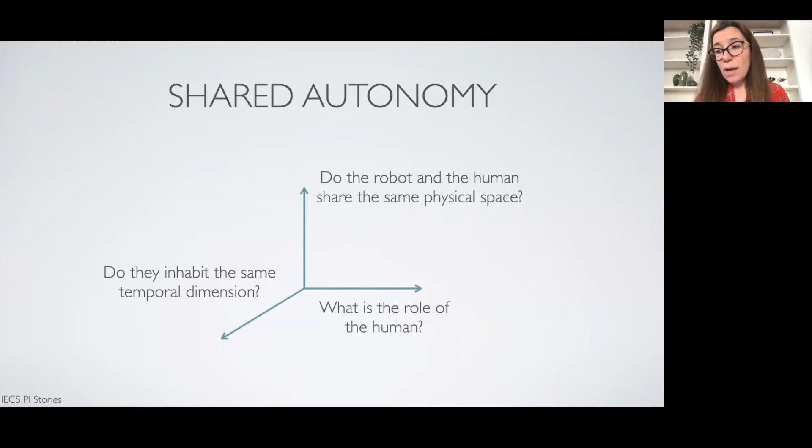The first is whether the robot and the human share the same physical space or not. The second is what is the role played by the human in this shared autonomy interaction. And the third one is whether the human and the robot can communicate smoothly with one another. And now I'm going to explore the interplay between these dimensions in the context of extreme environments, which are at the core of my research.

So extreme environments are all those environments that present very challenging and extreme conditions that make it difficult or impossible for humans to work in those environments. So examples are space mission operations or operations in nuclear facilities, subsea operations, and then applications in mines, underground, oil and gas, and so on and so forth. So in all these contexts, usually what we want to try to do is to send robots instead of humans as much as possible.

So in this case, if we consider this spatial dimension of interaction, we see that the human and the robot usually don't share the same physical space. And this is the whole point, right? We want the human to remain safe and to send the robot in the remote space in order to perform tasks. So they don't inhabit the same physical space.

Now, due to this, in many cases, there are some significant delays in communication between the robot and the human. Imagine, for example, space mission operations or operations underwater. In this case, there is such a delay in communications that it is impossible to teleoperate the robot or to control the robot closely.

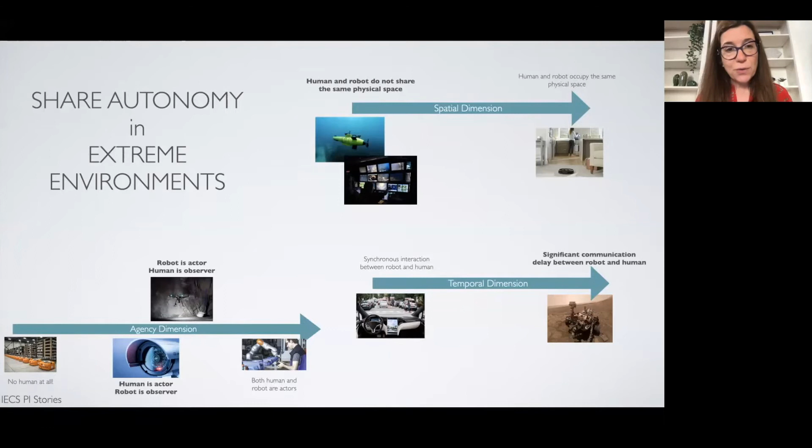And so we say that the robot is the actor and the human is the observer in this kind of applications. Now, clearly each extreme environment has its own specificities, but we can see that in fact they share several common challenges. And here I will highlight the most important ones from our point of view.

So the first one is that the robots need to exhibit a high level of autonomy. And this is because those robots usually function beyond line of sight. So they need to be independent and they need to be able to do tasks, and they cannot rely on direct help from the humans if something goes wrong, because the human is far away.

Then clearly robustness of operation is crucial here. And this is because these are critical environments where any mistakes can lead to fatal consequences. So we need our robots to be exhibiting an extremely robust behavior. And then also in these extreme environments, there are safety standards that are very strict in place. So those standards need also to be satisfied by the robots.

So safeness of operation is crucial, and also the ability to provide guarantees on performances for the robot. And then also imagine that these environments are characterized by a high level of uncertainty, and so the robots need to exhibit a flexible behavior, so dealing with all these uncertain factors, and also flexible because in these environments many tasks need to be performed. So we cannot really train the robot to do exactly one thing like with machine learning techniques. We need to have a robot that can perform a variety of tasks with sufficient robustness.

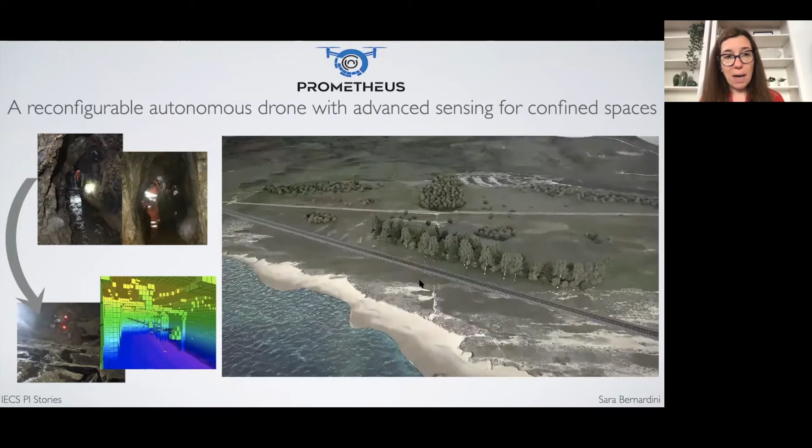So let's start with the first one, which is called Prometheus. So Prometheus is about exploring mines that are close to the Network Rail. And in fact, currently these mines are explored by human operators, as you can see here, but these are extremely dangerous tasks.

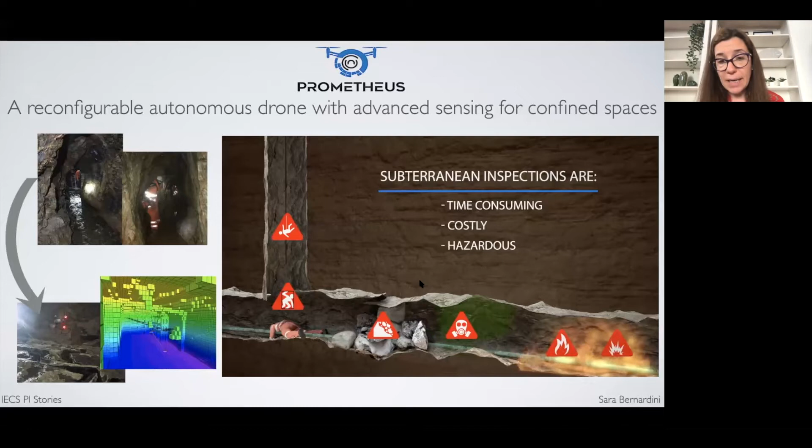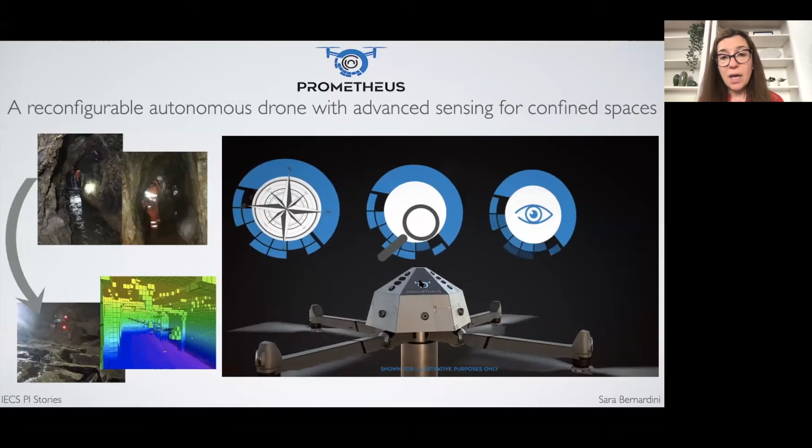And there might be fire, there might be gases in these mines. So these are extremely dangerous environments, and so it would be much better to avoid sending humans in these spaces. So our idea here in our consortium is to develop a drone that is reconfigurable. And this drone will be able to inspect these mines underground by using AI techniques and also advanced sensing techniques.

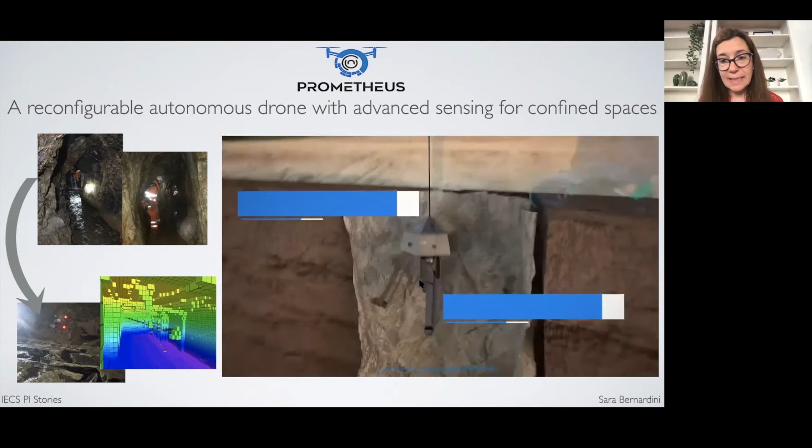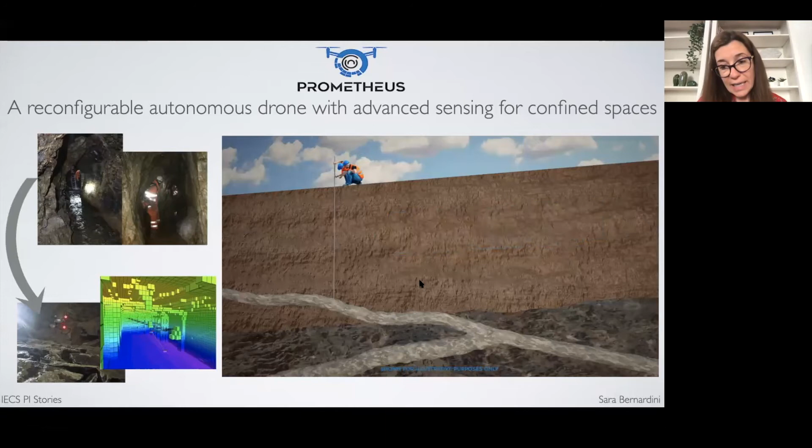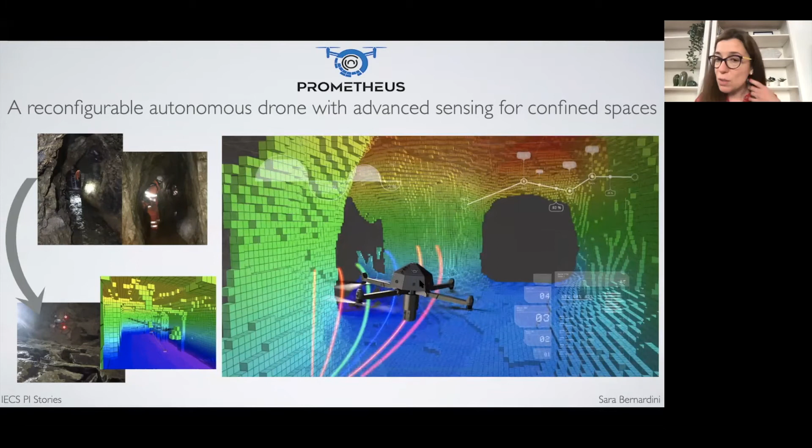As you can see, the drone is quite small and can enter into places, holes that are 150 millimeters. And then once it reaches down, the drone opens up to be able to fly inside, beyond line of sight. So as you can see now, the drone is open here like a flower, right? And is going to map the area. And this is what I am responsible for: this intelligent exploration of the mines to create a volumetric map and a map of the environment.

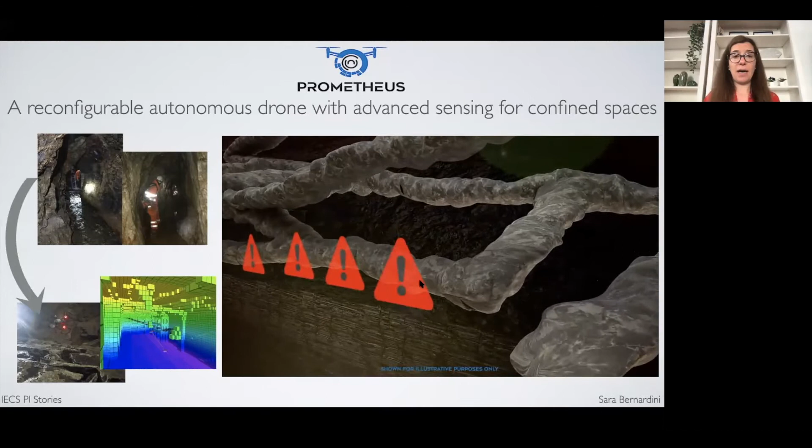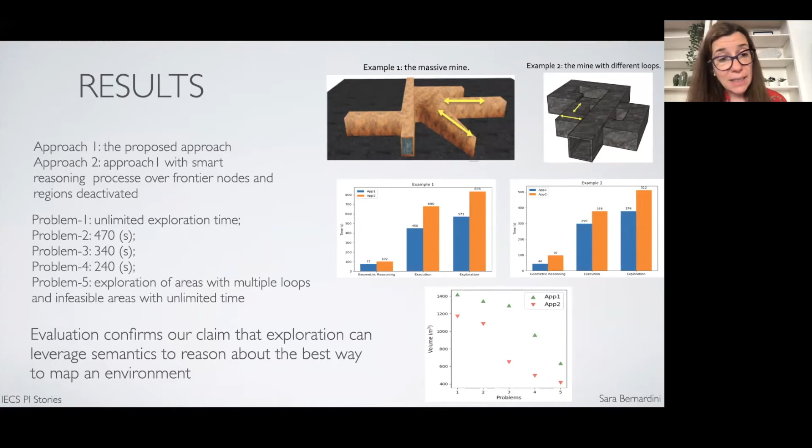Now, these are actually some results that show that our approach, represented here, is able, thanks to this exploitation of semantic information, to explore bigger regions in a shorter amount of time. And so our evaluation confirms our claim that exploration can leverage semantics to reason about the best way to map an environment. Now we are working on an improved version of our autonomy architecture for exploration.

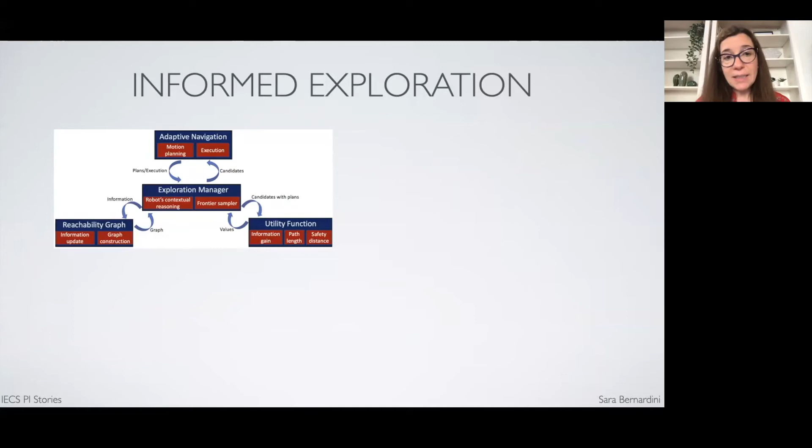And so what we have done, we have improved the rapidly exploring random trees in a way that we call risk averse, because in extreme environments, and in particular in these applications about mining, it is very important to be able to retrieve the robot at the end of the mission. So we want the robot to be able to go back home and come out from the mine. And so in this risk-averse version of RRT, we allow the robot to reason about known space in order to find paths, instead of also considering unknown space, because when it wants to go back home, the robot needs to be able to take a safe path.

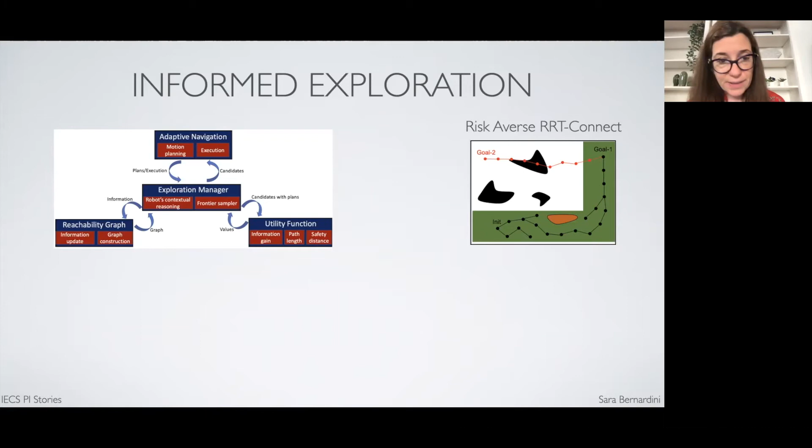So we have modified this technique to make it more risk averse. Then we are using now, instead of the semantic network, what we call the double weighted reachability graph. This is a graph that we have developed, and this graph represents the structure of the environment, also keeps in memory dead ends and places already visited, so that we can maximize the space explored in the time that we have. And so also we keep track of the best candidates that need to be explored next.

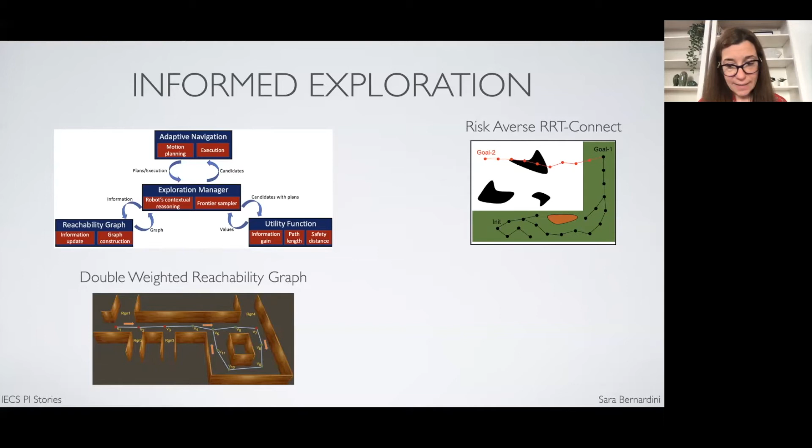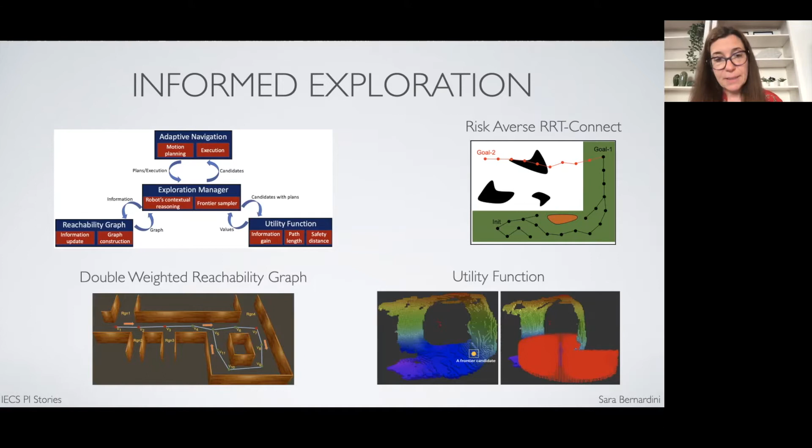Now, to actually choose the next point to explore, so to choose between the different candidates that we have in the open frontiers of nodes that we still need to visit, what we do is we use a utility function, which is based on information gain, but also on safety constraints, because again, in this application, safety is very important, and also on path length, because we also want to consider the resources that the robot has. Because as you know, flight time is limited. So this is our improved architecture.

And in fact, here you can see that we have used it to map real world mines, actually in the UK. Here in the video, you see a mine that is Snailbeach in the UK, but also in the other picture, you see that we are able to map and to create a volumetric map of quite sophisticated mines. And so these are all real world experiments here.

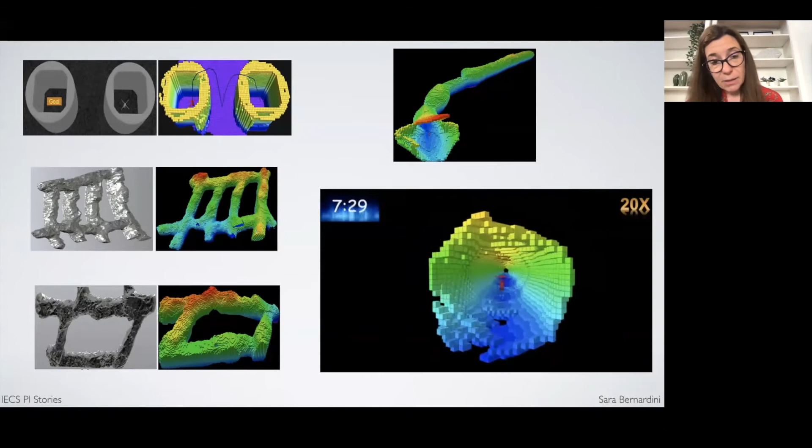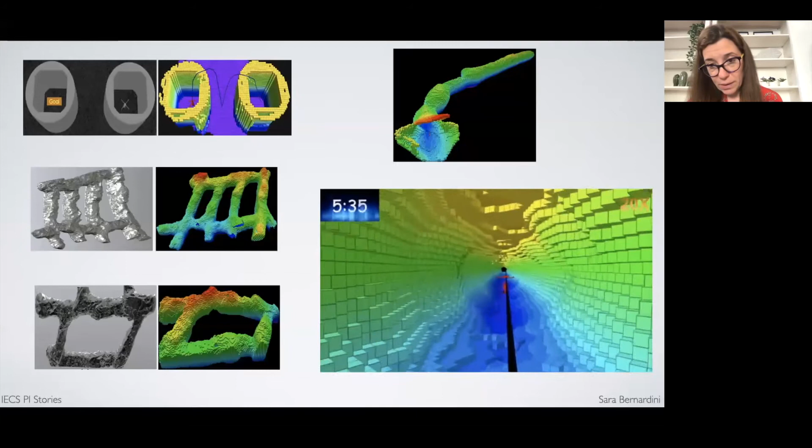And then after we have the map, we are able to bring back the robot home by following a safe path that is going to be also very efficient. So you can see here now the robot is going back home directly. Okay. So now this was my first project, Prometheus, so about mining.

Now let's go to see another one, which is called MIMRee. So MIMRee, in this project, our ambition by the end of the project is to have the world's first fully autonomous platform for the inspection, maintenance and repair of offshore wind farms. So this video here explains the mission.

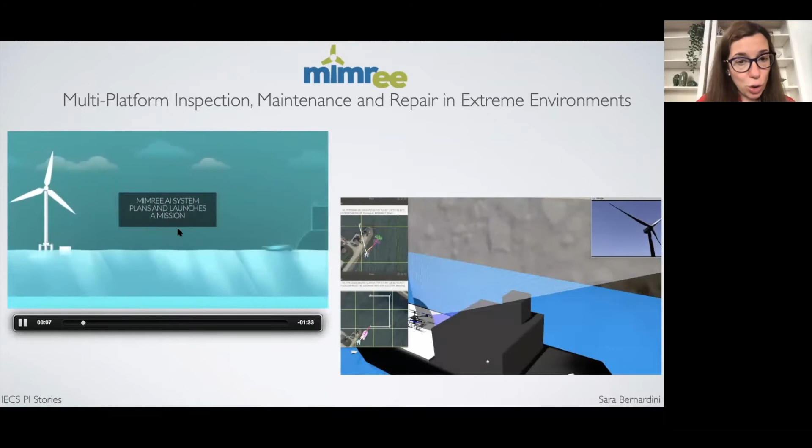Okay, this one actually. So in this case, we have an AI control system onshore, which plans and launches a mission. Then, as you can see here, we have an autonomous boat that goes from the shore to the actual wind turbines, and this scans the turbine at a distance. And this is very good because we don't actually need to stop the turbine doing that. Then we have drones that can be launched from the boat that are going to scan and map the blade's surface of the turbine.

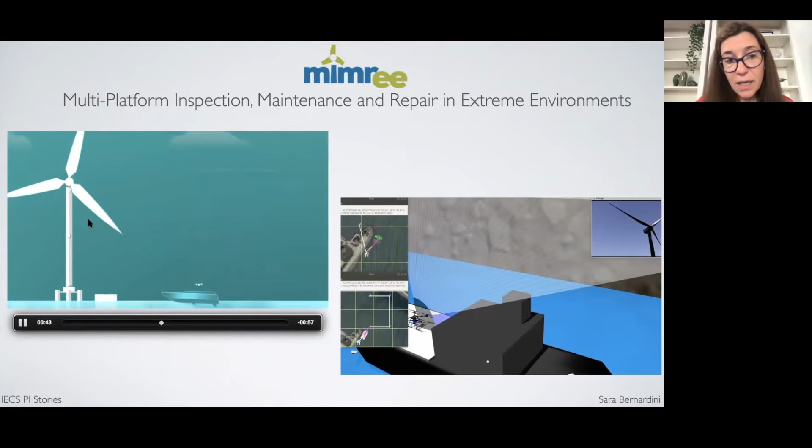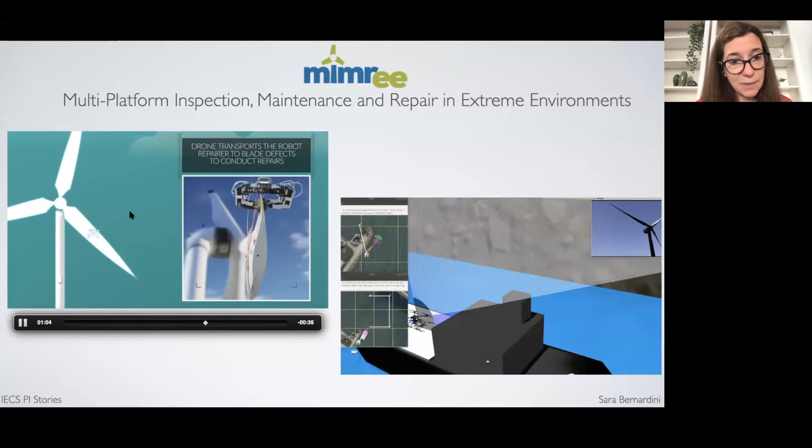And then if the drone decides that the blade needs repairing, the drone can pick up a maintenance robot that you can see here, which is a climbing robot that has the capability of walking over the blade here and to go to the place that needs repairing, and then the drones come back, pick up the robot and bring it back to the autonomous boat, and then at this point the boat can go back to shore.

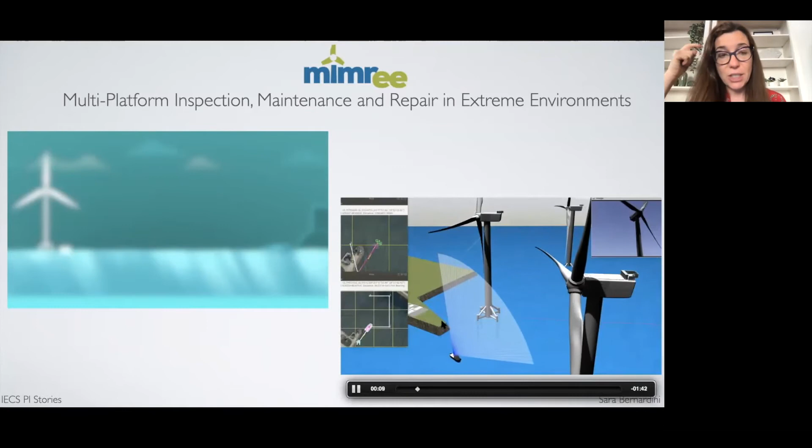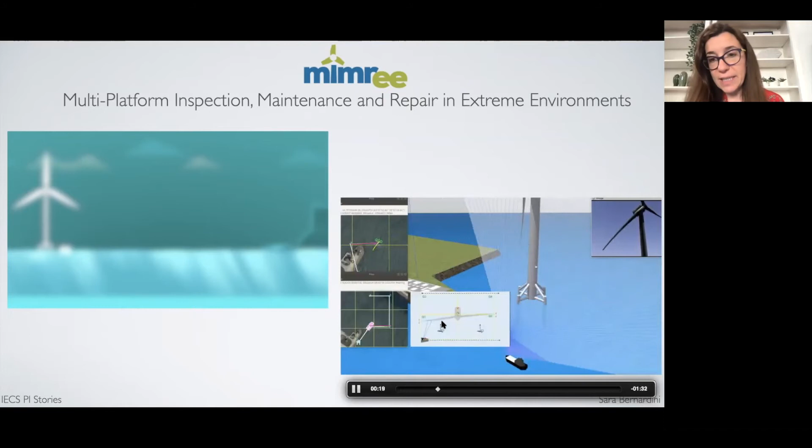Here you can see a Gazebo simulation of the same mission. So in all this project we use simulation quite a lot because, as you can imagine, it is extremely expensive to deploy these robots in real trials. So first we create sophisticated simulations of our missions to make sure everything works well, and then we deploy in the real world. And in particular, we use Gazebo quite a lot.

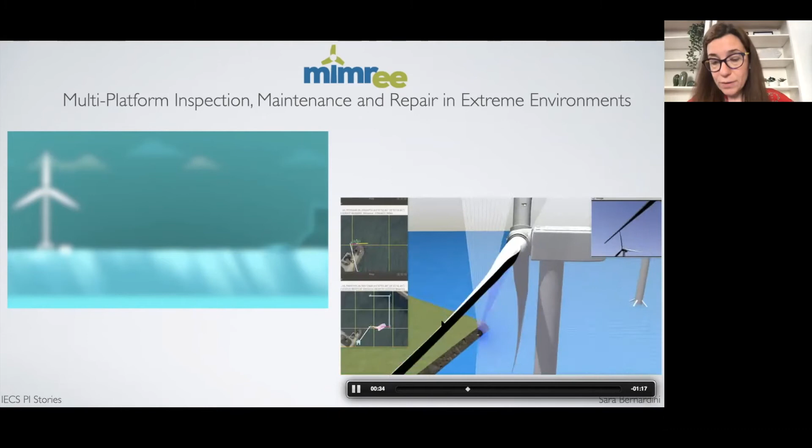And each of the feet of the robot has some electronic skin. And this has 2 purposes. The first is to stay attached to the blade, and the second is actually to be able to feel the surface of the blade to understand whether the blade needs some repairing or maintenance.

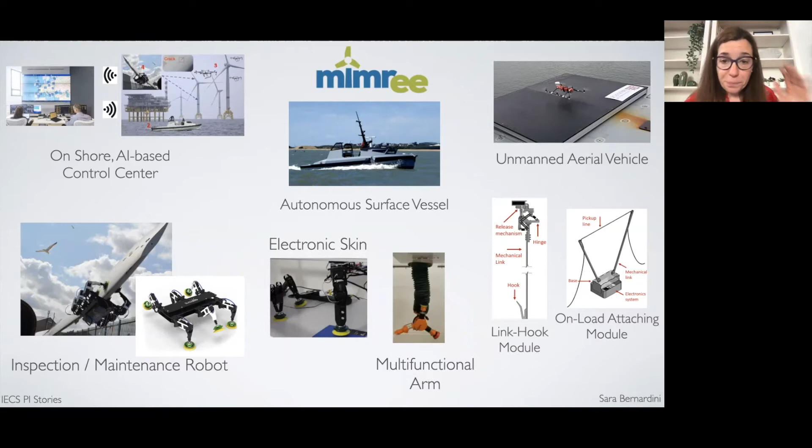So this, as you can see, is a pretty sophisticated multi-agent system. Constructing a complete mission plan in our project MIMRee requires addressing multiple issues: communication, coordination, cooperation between the multiple assets, but also task and path planning and replanning. Then we have a human-machine interface so a human operator can interact with the system, and domain representation for our planning.

And then we use planning to create the mission and task plans. The mission plan has to do with, for example, a long-term plan that could be for weeks or months, about inspecting several turbines. The task planning has to do with the tasks each robotic asset needs to perform. And we use, in this case, PDDL planning.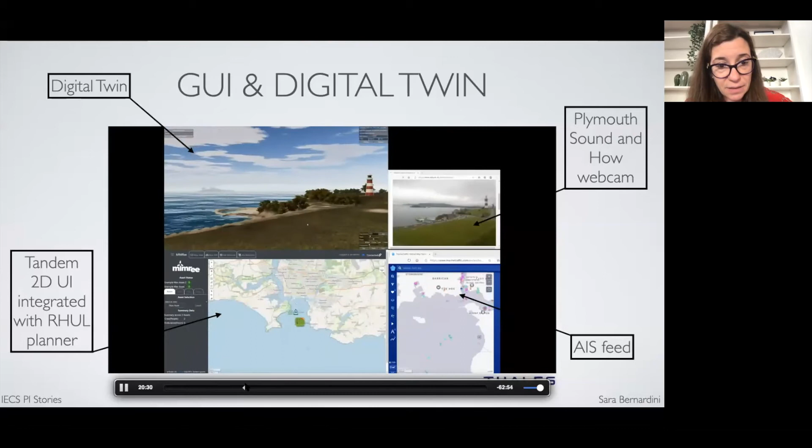And so you can see the boat here, and then you can go very close, and then for example, here it starts raining, and so on and so forth. So we have a quite sophisticated architecture here. Here we have a webcam. So we try really to make it very easy for the human operator to feel that he or she is in control of the mission. And this was, in fact, developed together with the company Thales.

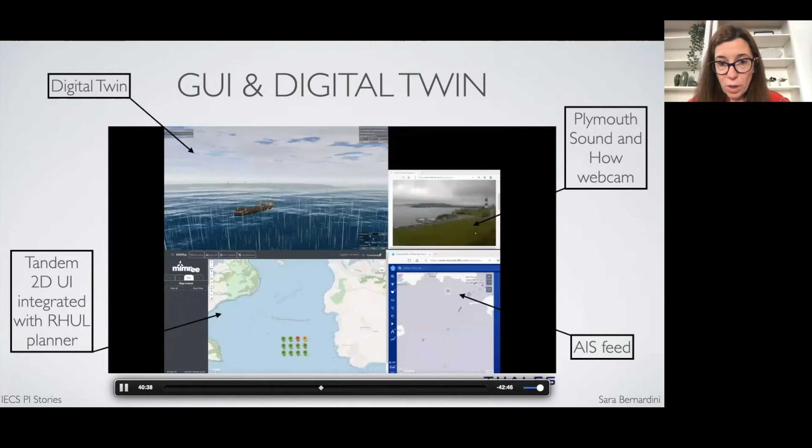So this is for MIMRee. And now I will go to discuss the last project I wanted to cover today. This is called Connect R. As you can see, we have these two papers at ICAPS coming up in August.

In Connect R, we started from the observation that in many situations in extreme environments, we actually have problems with heavy ground robots traversing the environment. This is because there might be water, sludge, obstacles, and so it is difficult for the ground robots to go from one point to another where something needs to be done. So our research question was whether it was possible to create a structure that self-assembles itself in an unstructured environment so that it can provide structure for another robot to come in and go to a specific place to perform tasks.

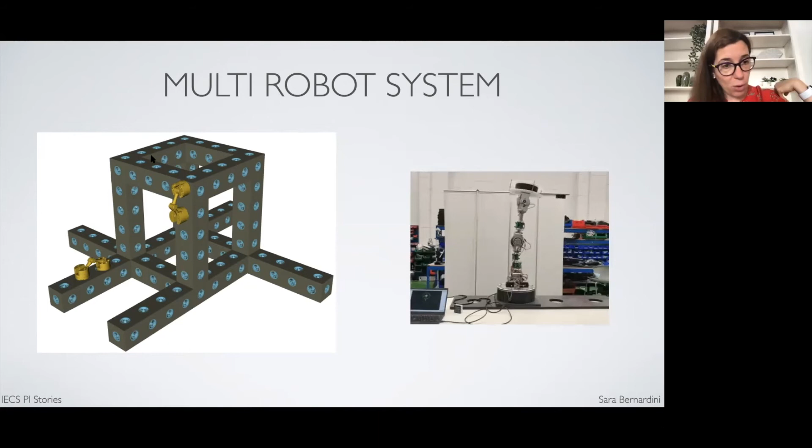Now, let's see how we do that. So our first task is to understand how do we create this multi-robot system that self-assembles itself. Now, we came out with these building blocks that you can see here on the picture. These are cuboids with 4 equally spaced connection points that you see in light blue here on each face.

And then at the end of each cuboid, you can see there are 2 actuating manipulators. These have 3 degrees of freedom, as you can see here in the bottom part of the picture, so they can rotate in 3 different directions, and these are really the driving force of the robotic structure, as we will see in a moment, because it is thanks to the movement of this manipulator that we can create the self-building of the structure.

Then also we have a basic locomotive ability here. As you can see on the right part, the cuboid can extend in this horizontal direction. And then it is important to note that each unit gets power and structural support by being connected to other units. So for the structure to be live, all the cuboids need to be connected with one another. And then we have an initial structural robot that receives power, and then the power traverses the structure from one structural robot to the other.

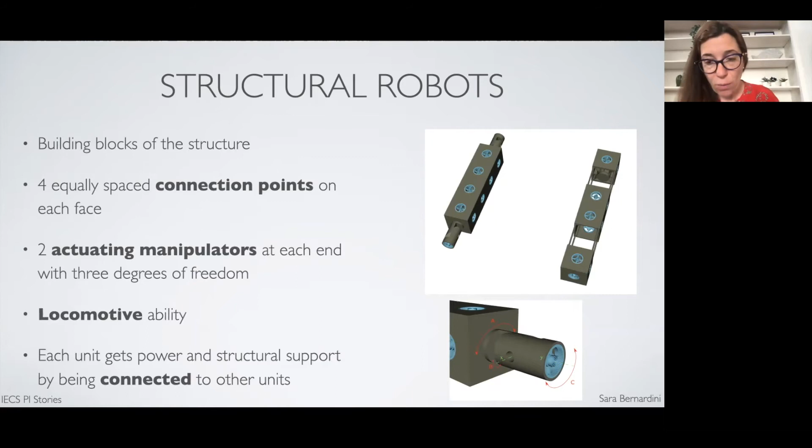Now, we have found that we need some primitive actions in order to create structures. Imagine that here we have to consider spatial constraints for the structure to be able to build itself, of course, but also structural robustness constraints, because we want a structure that is safe. We don't want the structure to collapse when the robot traverses it, otherwise we defeat the purpose of the system.

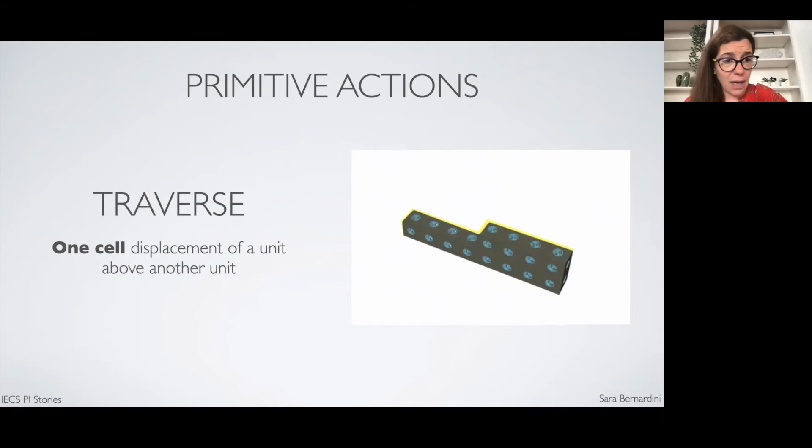So we had to come out with some primitive actions that allow us to build sophisticated structures, but also to satisfy these constraints. Here you can see one action that is traverse, that is just one cell displacement over a unit above another unit, as you can see here. Then we have a place line, which is to create a vertical line.

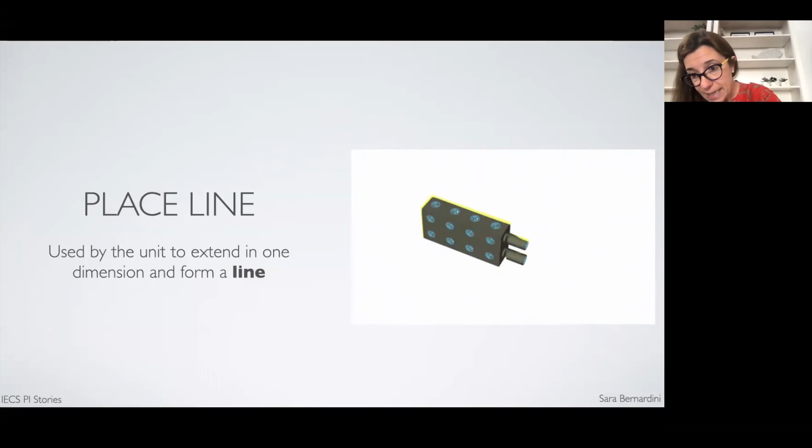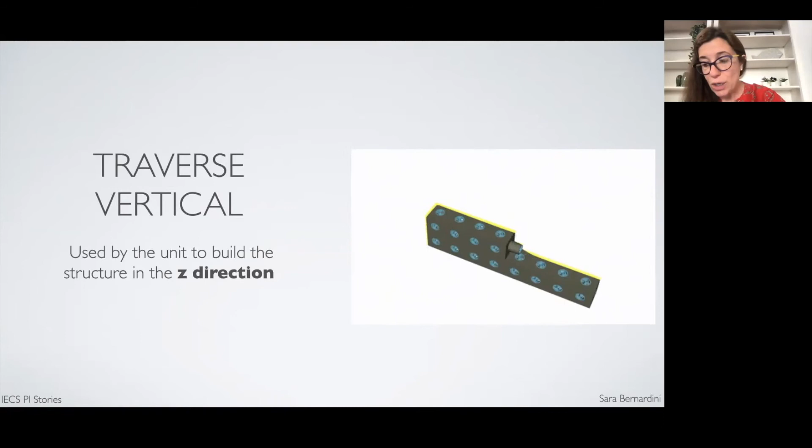In this little video, you can see the manipulators that create the movement of the structure. Then we have, for example, vertical traverse that is to expand in the Z direction. And then we have this one, which is to create a right angle. So in the end, we found out that we need these 7 primitive actions in order to create structures that could be quite flexible in their final configuration.

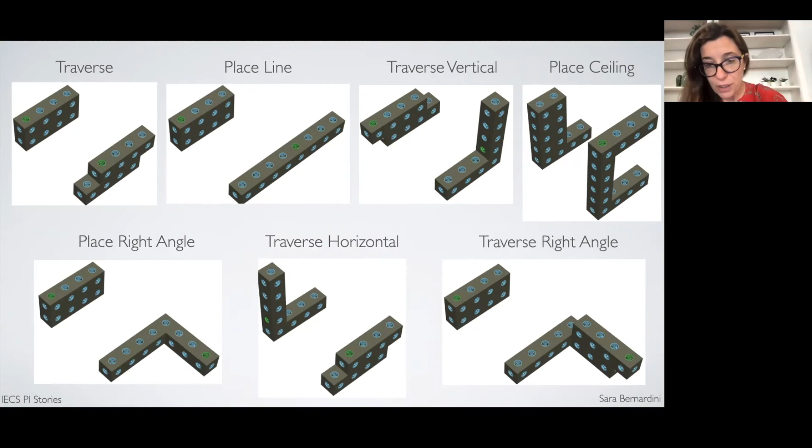Also, all these actions can be described in terms of their initial and final configuration. Now that we have these primitive actions, how do we go about constructing the final configuration? Here I just put an example to show you that with these 7 actions, you can develop quite sophisticated structures. So this one has been done fully automatically, with no human intervention, and it is the system that decides how every cuboid needs to move in order to create, in this case, a cube.

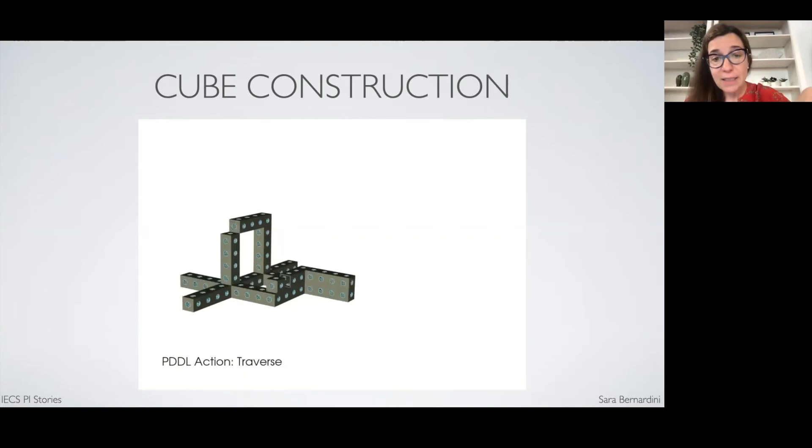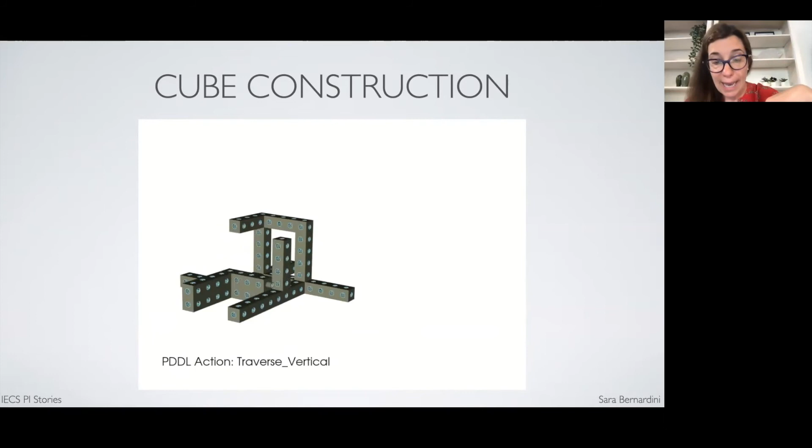So as I said, this is done with these 7 basic actions, but now we have to see how we have done this automatically, not by hand. And this is clearly something we don't want to do by hand, because we are dealing with quite complex operations. Imagine that just to create this structure here on the right with just 4 robots, we had to use 10 actions. So we really want to avoid writing scripts to create a difficult final structure.

And also we want to have some flexibility, to be able to specify any final configuration and achieve it automatically. And again, as I said in the beginning, it is very important, especially in nuclear decommissioning tasks, that whatever the robot does, it comes across as clear to the human in the loop. So whatever we do needs to be explainable, and the human in the loop needs to trust the behavior of the robot, because these are critical environments in which the human operator cannot allow mistakes.

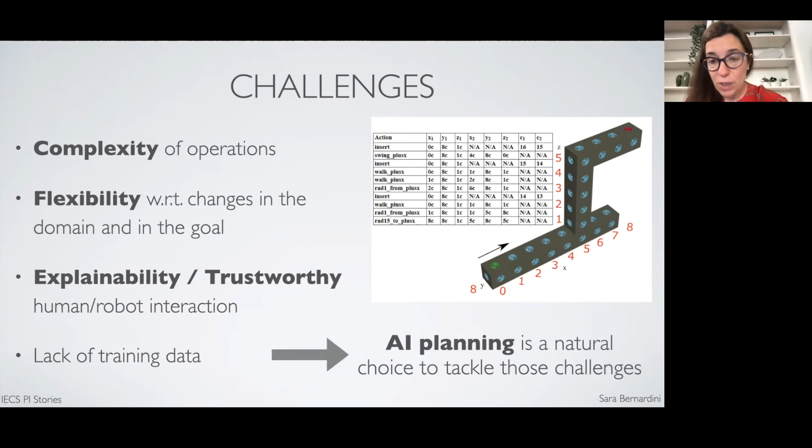Also in this kind of environment, because they are usually unknown before we go into them, we lack training data, and so we cannot use machine learning techniques. So here AI planning again becomes a natural choice because it satisfies all these constraints. The problem here is that AI planning is notoriously difficult in 3D spaces, and we are here in 3D spaces. And it is difficult because there is a lot of symmetry you have to deal with, and your state space explodes, becomes very big quite easily.

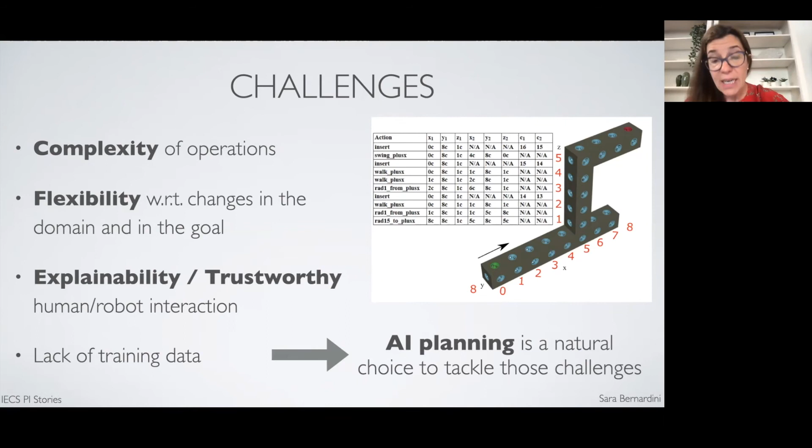So we had to come out with a smart representation of our problem in PDDL. We use PDDL, but before getting there, we had to really think about how to find a succinct and efficient representation for this problem in order to create plans quickly and in an efficient way. So by studying this problem and trying out many different representations, we came out with this one that we are going to present to ICAPS very shortly.

And the idea is that all the connection points of the robotic units that you have seen, the light blue points in the cuboids, become the points in a 3D map. And then we have this 3D map constituted by those points. And then each unit, each robotic unit, can be represented only by using one point, XYZ, that is the starting point, and an orientation. We don't need to represent all the 4 points.

And finally, we notice that actually the robotic units are functionally identical to one another. So we don't need to represent each robotic unit specifically. What you need to do is know how many you have available to develop your structure, and whenever you use one, how many are still available. So we use a countable robot representation in which basically we know how many robot structural units we have outside the environment, and whenever we introduce one, we subtract from this number. And then we have this predetermined entry point for all robotic units.

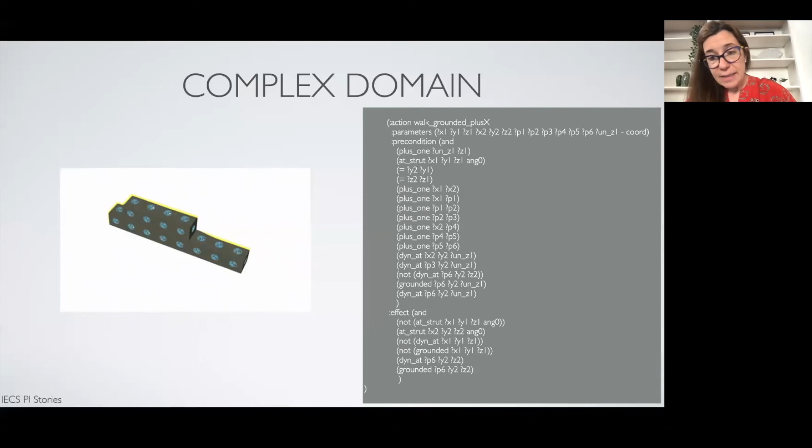Then we have actions that correspond to the 7 primitive actions that I showed you in the beginning. In the end, we have 20 actions that are variations of those 7 that you have already seen. Now, if you are familiar with PDDL, I just put here a description of one action, this simple action of traversing. And you can see that the description is fairly sophisticated.

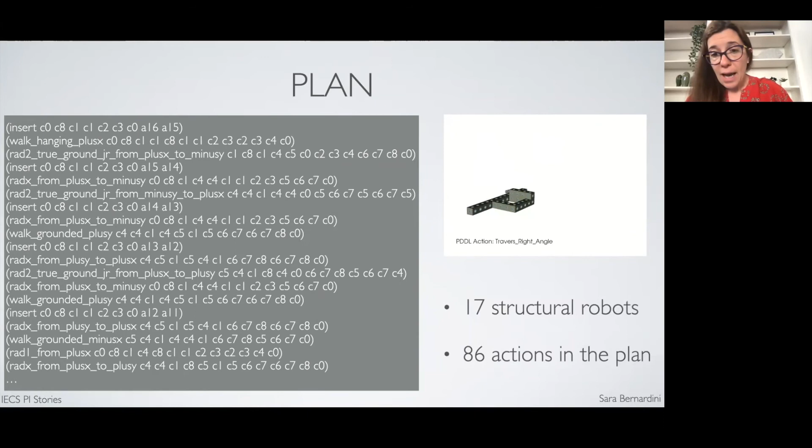Now, for the plans, for example, for the cube I showed you before, we had to use 17 structural robots, and in our plan there are 86 actions. So I would say that the domain in this case is quite complex. Now, I put here these slides. I don't want to go into the detail of it, but just to say that... Sara, yes?

Just a quick question. So were these ground actions? No, this is specified at the lifted level, and then we ground the domain. So the real actions are way more. Those are just the PDDL actions, and then we ground the domain later, when we do planning. Okay, just curiosity. No, absolutely.

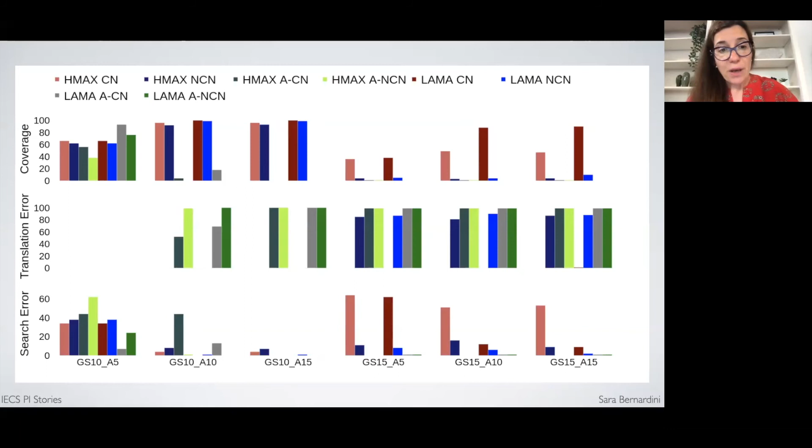And we were also able to solve some of the problems optimally, again with our canonical representation, whereas this was not possible using a more naive representation.

Then also for this project, we developed a GUI for the human operators, because clearly we cannot expect the human operator to understand PDDL or anything like that. So the human operator will have the opportunity to create the environment here visually, and then to specify the entry point and the exit point, I mean, the point we want to reach inside the space.

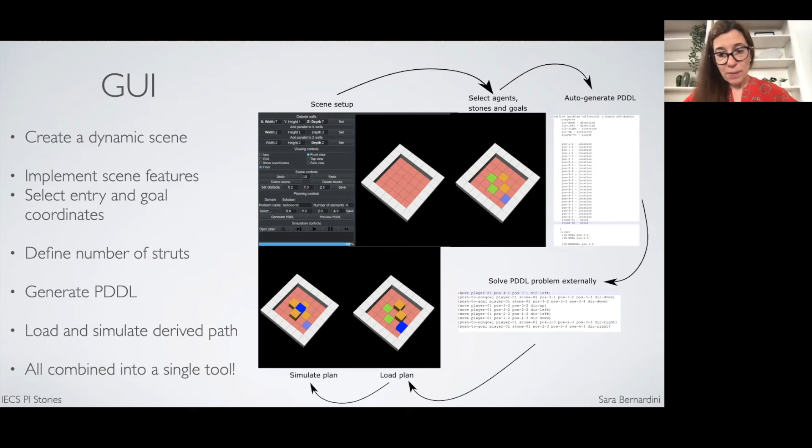Once he is done with this configuration using this GUI, we auto-generate the PDDL description, solve the problem by calling a planner, load the plan, as you can see at the bottom, and simulate the plan, as you can see in this simulation. In this case, for example, we want to reach this green point on the other side of the wall, so we have to create a bridge here.

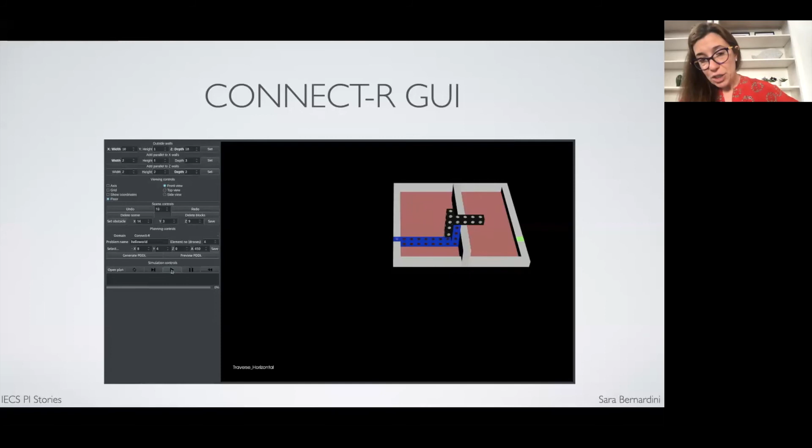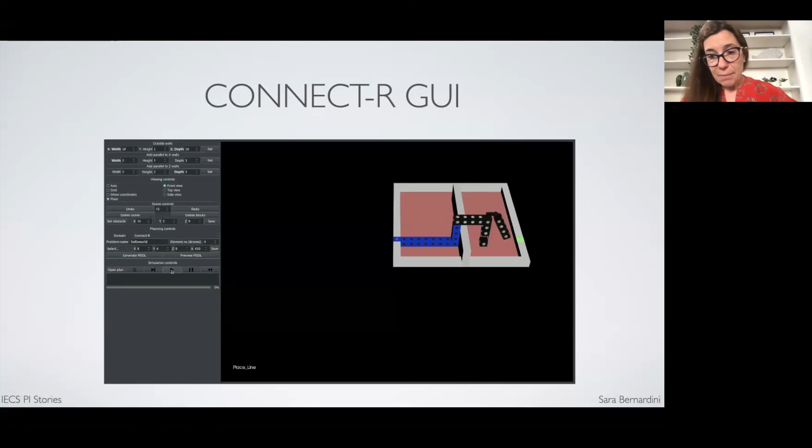After we finish, we have a bridge, and then the little bot I showed you before can traverse this bridge to reach the green point where things need to be done. The behavior of the bot is also underpinned by planning, but unfortunately I don't have much time to discuss this here. So both the construction of the robotic structure and the bot are underpinned by planning.

Okay, so this comes to the end of my talk. At this point, I just want to leave you with some open problems that we still see in extreme environments. The first one concerns robustness of operation. As I said before, robustness of operation is critical in extreme environments, because these are environments in which making mistakes is extremely costly.

So we need to be able to reason under uncertainty, because there are a lot of unknowns in these spaces, and we want to reason about uncertainty and risk online to achieve safety. The other point I was making before is that we need to ensure transparent and trustworthy human-robot interaction. This gives rise to many interesting research questions that I am also tackling in other theoretical parts of my research. For example, we want to create a behavior for the robot that is understandable to the human operator in the loop.